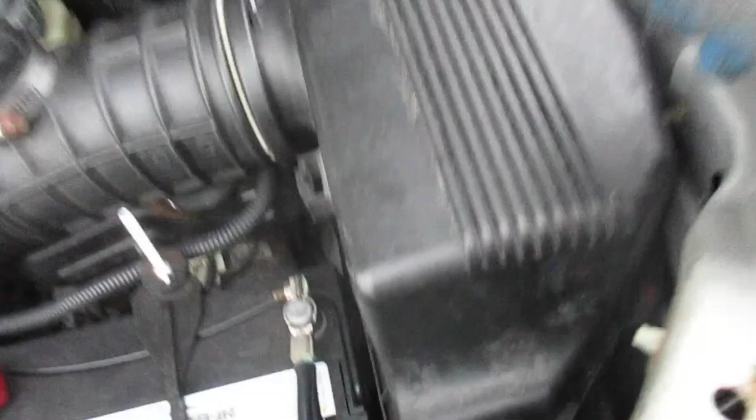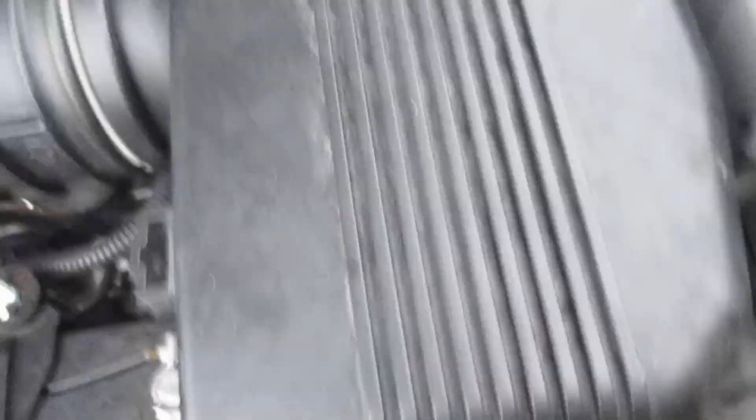So we're going to replace the airbox assembly with a junkyard part, and there's 2 bolts to remove it. One is all the way down there, and the other bolt is right back in here underneath this wire harness. Hard to see, but it's down there.

And here is our junkyard replacement. These are 10mm bolts down there. Very long extension needed.

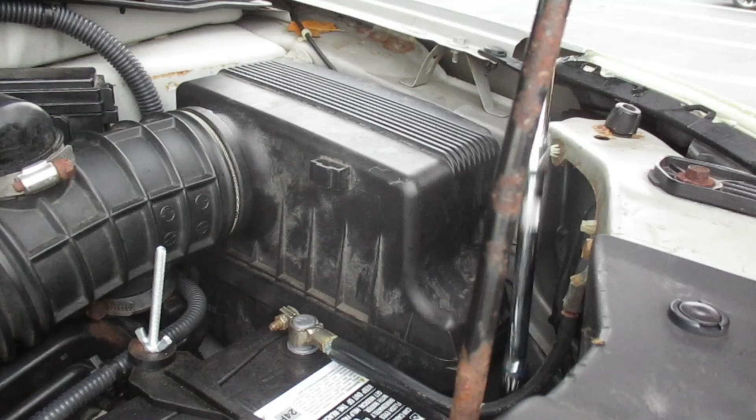It's kind of rusty, but it's alright, I guess. It's reusable.

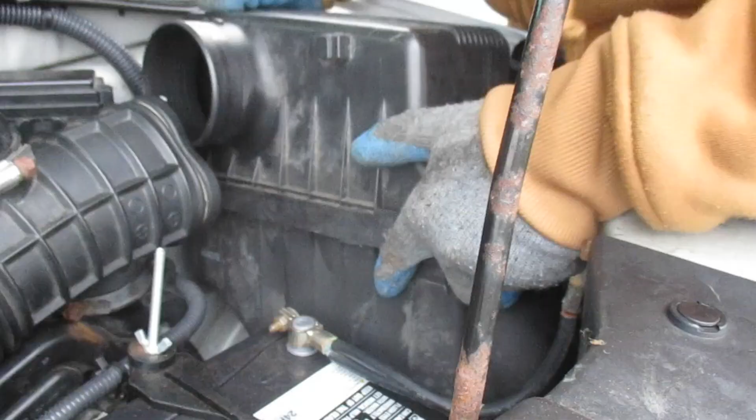Go past it already. Jeez. Thank you.

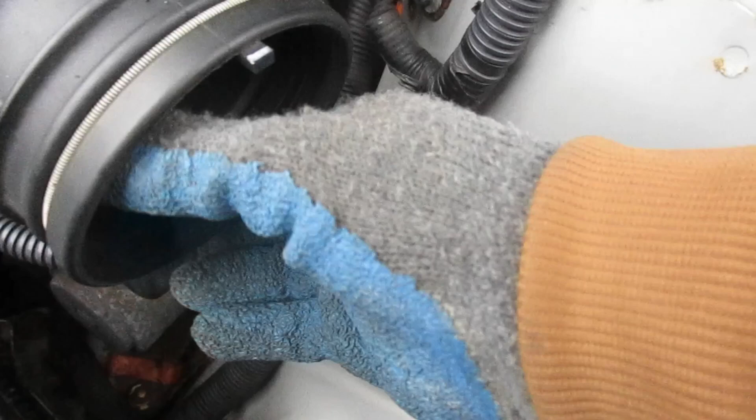Okay, right, there's the one mount that was stuck on. It was stuck on mostly this guy, but also this. Here's the airbox, the screw that got stuck in there, and this one that also got stuck in there. It's stripped. So yeah, now just gotta put the new one in.

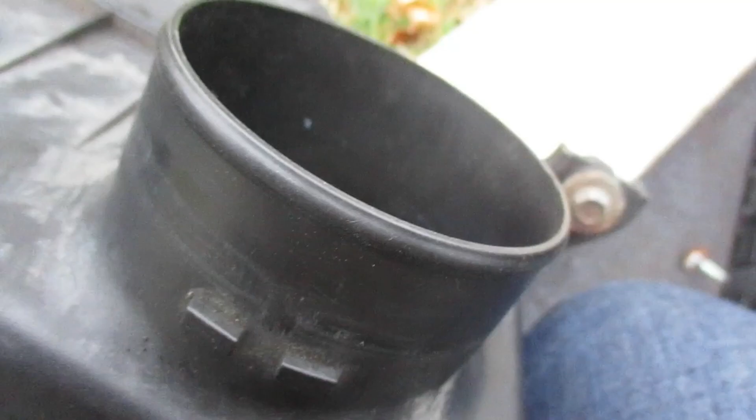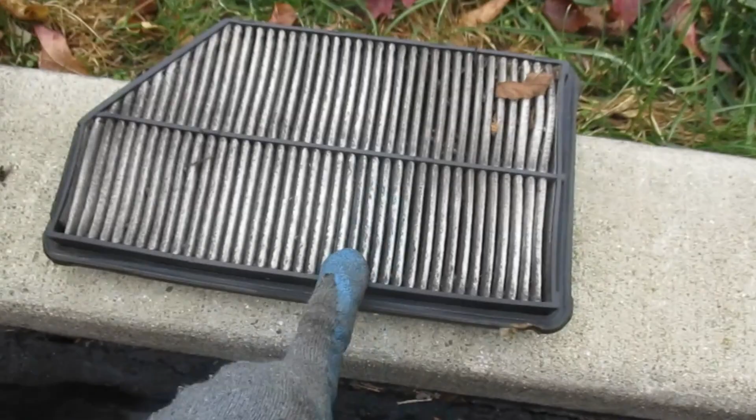So I got these painted bolts in, and this bottom piece down. But you know what I noticed when I tore this apart and broke it? He said the air filter was replaced, but it clearly is disgusting. And I think because it looked like this when you open it up, he thought it was clean.

I think he had someone else do the work, because the person I bought it from had the air compressor replaced. I checked that out, and that's true. I didn't check the airbox, I couldn't get it off. And I think the person he had do the work ripped him off and actually didn't replace the air filter, just left it like that. He thought it was clean.

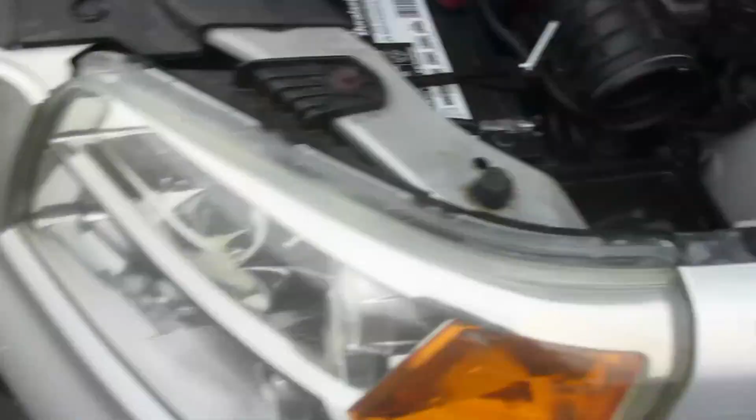So that's it. I'm gonna go buy an air filter now, and then I'll come back and screw these bolts back on with the top cover and the thread locker.

All right, back for round 2. Picked up an air filter at AutoZone, an SA9361. So I got this bolt painted and have some thread locker on it, and that's in there.

And the other one is down there, also painted with thread locker. And now we're gonna install the air filter. Nice and clean.

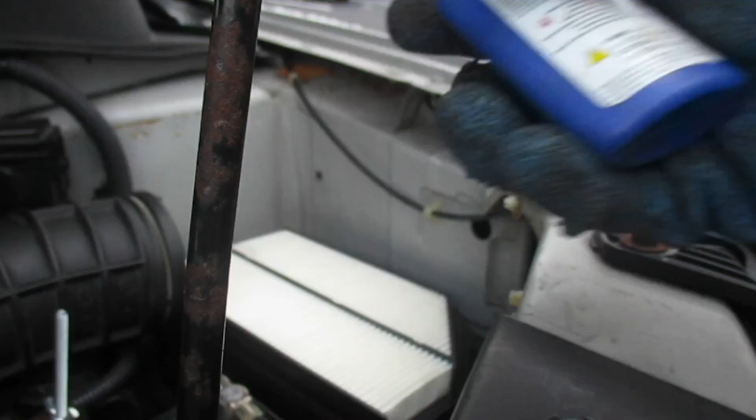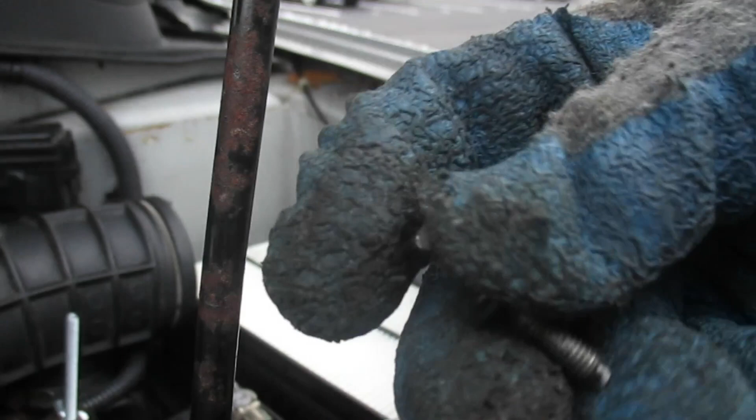The only thing I have is medium strength thread locker, and that's to make it easier to take the bolts out in the future and to keep water from getting in the threads and letting it rust. These smaller bolts take an 8mm socket, and as you can see, I've cleaned the threads and cleaned off most of the rust, and painted them a little bit so they don't rust as easily in the future.

So normally these little holes here have little metal sheaths in them that make it so the bolts are captive, meaning when you unscrew them they don't actually come out like this. But in order to get those 2 out, I had to break them out. So it's fine, we don't need the captive thing anyways, it just creates more rust and makes it harder to take out.

So now we're just going to thread locker these bolts, put these in, and then we're good to go. We have everything reassembled in a fresh air box. Kind of goopy, it's fine. That'll work.

There we go, so that is a job well done. Airbox replaced, air filter replaced, and next we'll do the cabin filter.

So next is the cabin filter, which is located behind the glove box. I happen to have purchased a 2006 Honda Pilot service manual, just to help give me a little bit of a heads up on what I'm going to have to do to change it out.

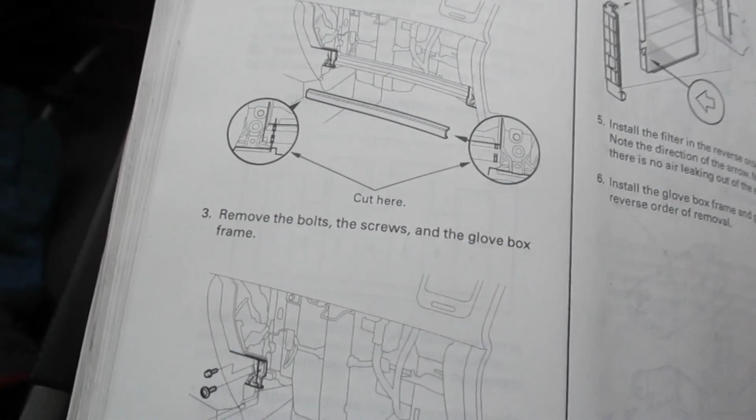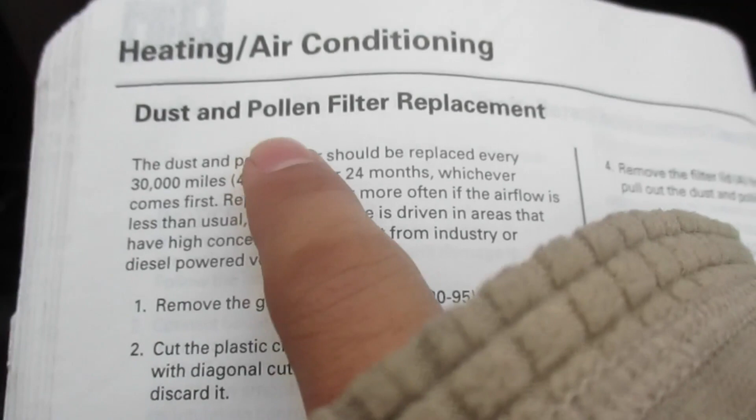Some cars sometimes have a few extra steps, and here we have the heating and air conditioning, that's page 2152, and we have the dust and pollen filter replacement, which is what we're replacing. It says cut the plastic brace in the glove box opening with diagonal cutters in the area shown, and discard it.

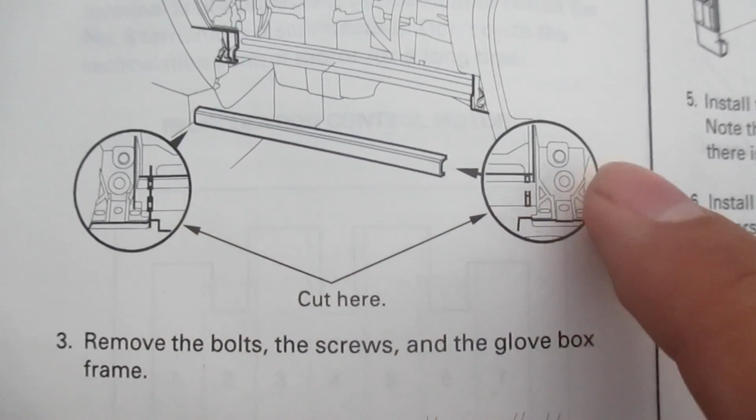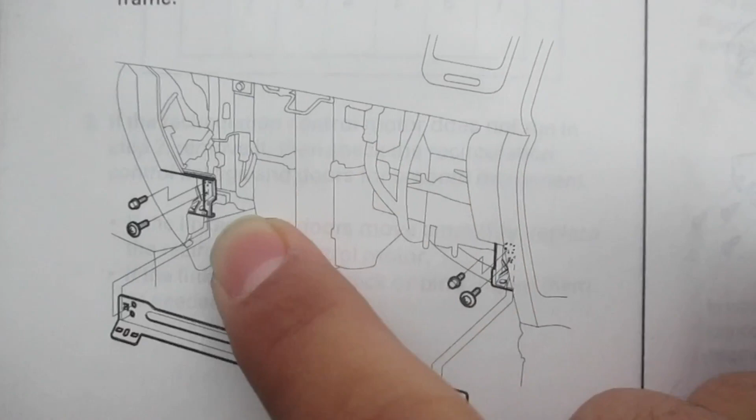So there's diagrams here showing that there's these little plastic clips holding on this little plastic bar, and if it's already been removed it won't be there, but if it is there you'll just cut it and remove it. Then there's remove the bolts and screws and the glove box frame, which are located here. There's a frame, and then there's just a cap on the filter, and you'll remove that to replace the filter and then reinstall everything in reverse.

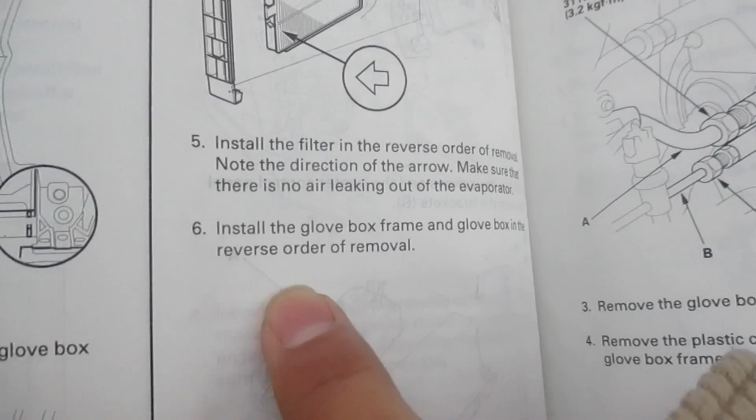And so we'll go step by step on how to replace that in here. So the replacement filter is a STP CAF 1770 air filter.

If I can find some more of these online that are maybe better quality, I'll pick one up. But for now, STP will do for 6 months or whatever until I replace it again.

Alright, so it looks like we pull this down first, and there's some stuff in here, I'll just remove all that stuff. There we go. And then there's these little clips on the side here, you can see, that have little ends that you pinch in, so I'll have to get some pliers in there and pinch it out.

Now mine only has one because the other one's missing, but at the junkyard I went and picked them up, they're free, just these little clip things here. So open my door a little bit. There we go.

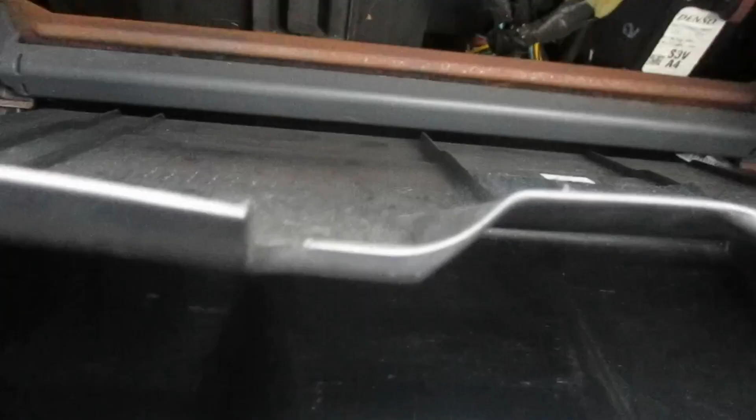Got it. Push up on this a little bit, pull this up. There we go. Oh look, my cross member's still there.

This dude said that the cabin filter was replaced. Well, that's a lie, because if it was, this would be clipped, and it's not. You can see there's these little spots down here where you're supposed to clip it. So it looks like I'm gonna have to remove that.

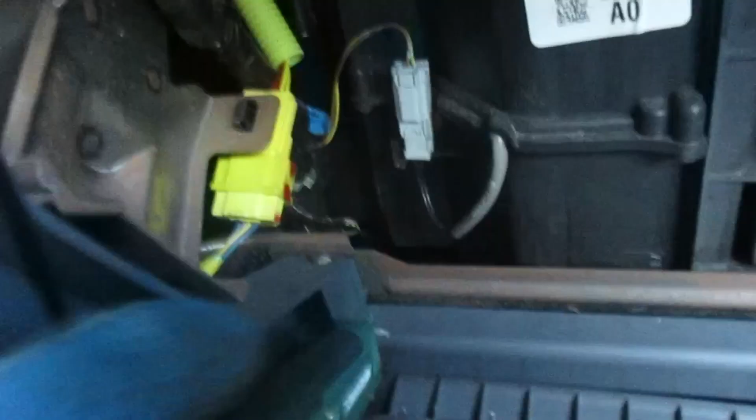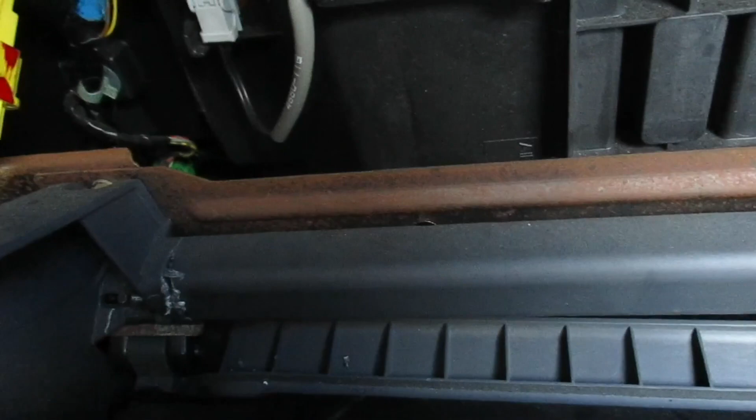Alright, well this is really hard to do and record at the same time, but basically I'm just taking a razor blade and cutting these little slit marks on this plastic trim until I get it free, just working the razor blade back and forth. That's all I really have that works well, and the razor blades are sharp, so.

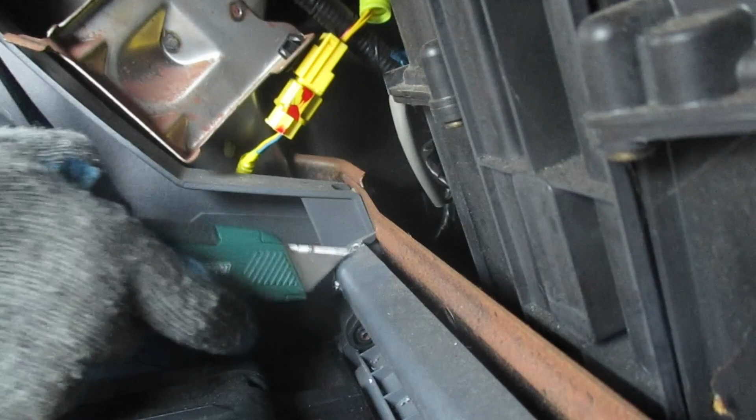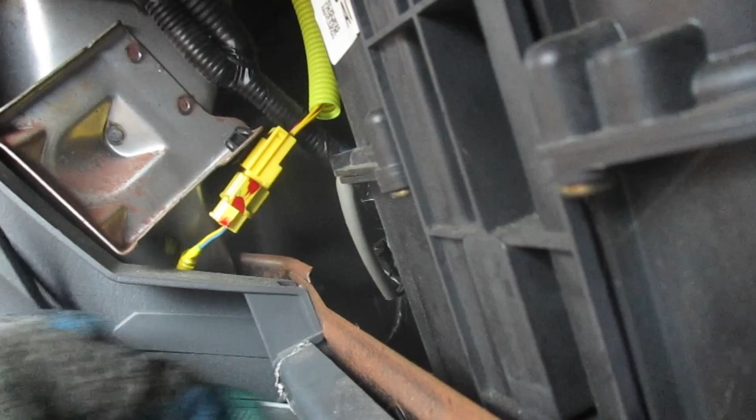Almost there. Hey! Oh, what do you know? Alright, so I got one side free. Looks like I might be able to just bend this out. Oh well, I started breaking it a little bit too. Alright, I guess I'll cut the other side too. Come on, there we go.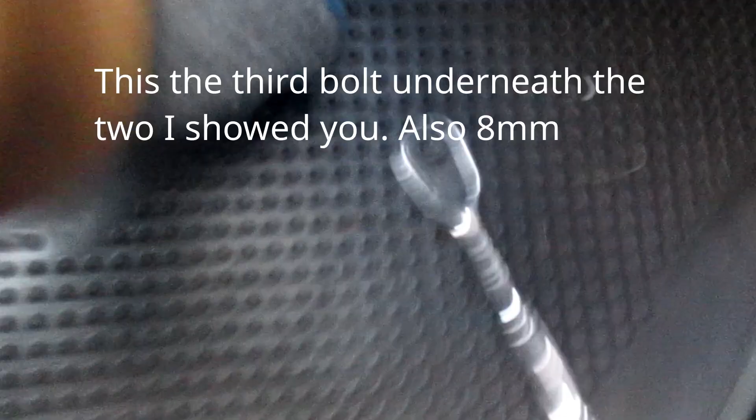Alright, a little 8mm with our two Phillips in there. Okay, finally got it out. These are also 8mm, but they're a pain because they're upside down and underneath, and yeah, it's just a nuisance.

Okay, so you know what? Getting this thing out is a pain in the ass, and I'm not going to bother removing it all the way, and I don't have to. This bolt is behind this piece of plastic here connected to this part of the glove box. But there's a wire harness and a fuse box in the way, so I'll just screw it.

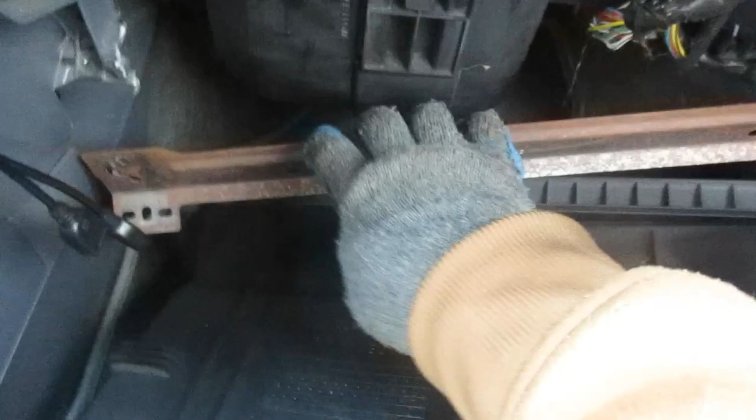You can just pull this down enough, carefully, so don't break anything. You can still access this top part of the cover here for the cabin filter. And if I can pop it up, I can do it from the bottom.

Okay, yeah, the trick is to open the door, let this fall down a little bit here, and then you can reach under and grab this plastic panel, which is disgusting. That's never been cleaned. There's hair, leaves, cobwebs and plant matter and stuff in this thing.

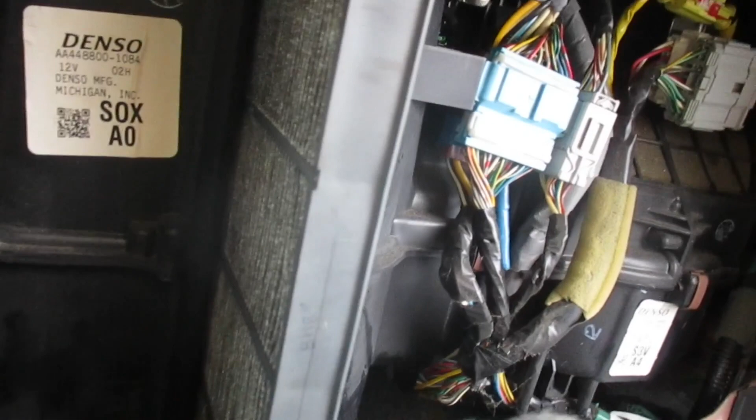Oh, look at this. What do we have here? Oh, goody. Oh. Uh-oh. Oh Lord, it's gross. Oh, there's stuff in there. This thing is black. Oh yeah. Oh dear, there's dirt in here. There's gunk in here.

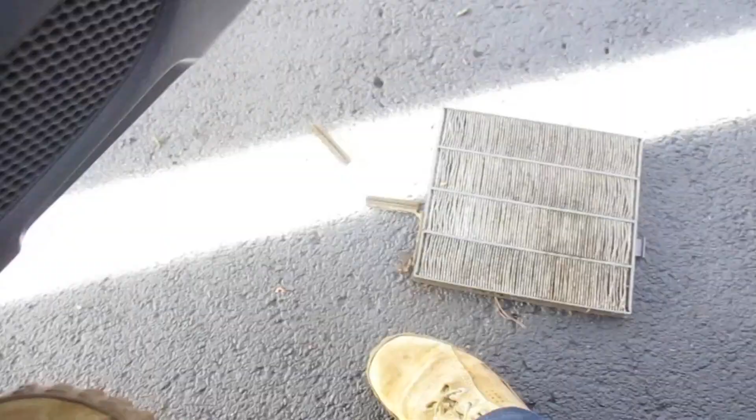Alright, well let's take a look at this old one. Well, it's definitely gross. There's all sorts of fun stuff on there. Ew, that's gross, man. That's like how many years of not being replaced. Oh, and it's all caked in there. Okay, yeah, I've seen enough.

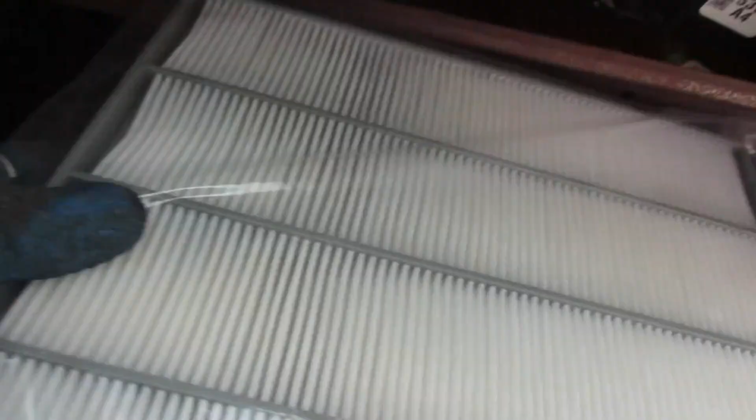And here is the new one. That's what it's supposed to look like. So just for reference: good, bad, good, bad, clean, not clean.

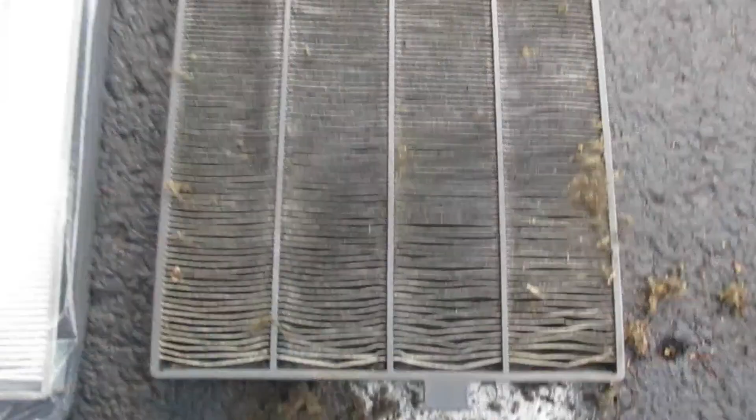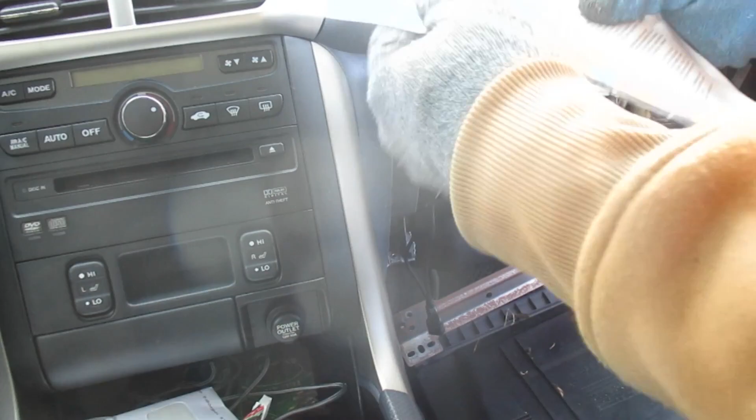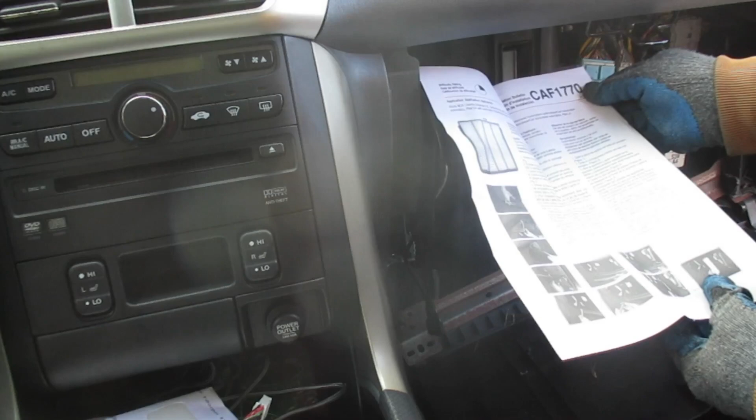It comes with a little manual thing, so you don't put it in the wrong way. It even tells you how to take it apart. And the tab is supposed to be on this right side, on the lowest part. That way you don't put it in reverse, since you can put it in the wrong way.

Now we're good, now we just put it all back together. Hooray. This is a thick part and a thin part, thick part on the bottom. Push that back up in there.

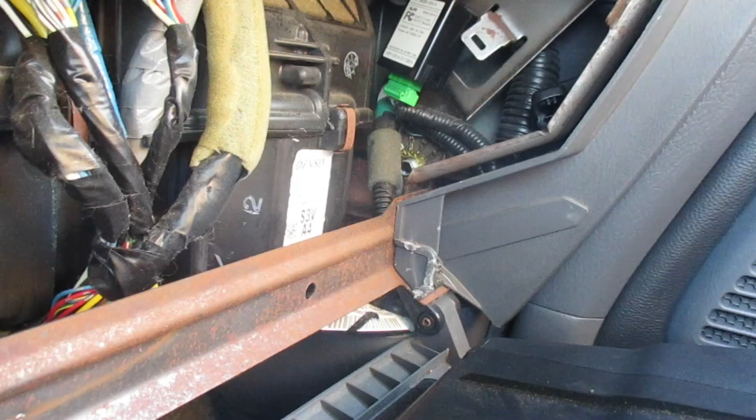Okay, it's not as bad as it could be, because being able to just remove that one side makes a lot more sense. That means you don't have to remove the 2 bolts on the right hand side, you just have to remove the 2 on this side. I'm pretty sure the instructions tell you to do both, which is not fun.

I'm gonna put this back into this. I can't do this with the camera though, so. Okay, I got that bolt down in there, back in place. I just gotta do the other 2, and then the clips back in, and we're good to go.

I think whoever he had do the work ripped him off. Probably charged him more for work he didn't do.

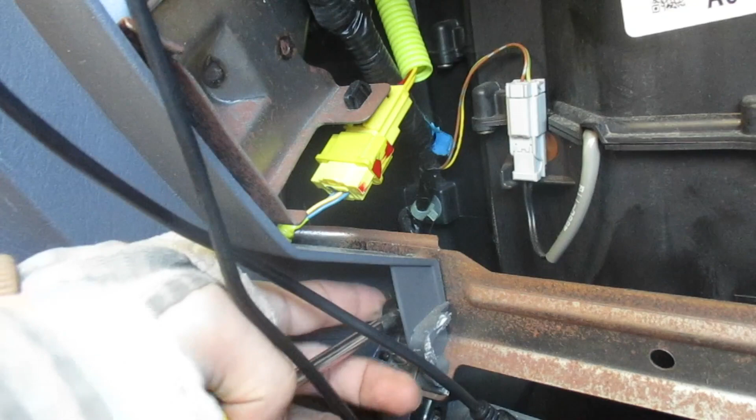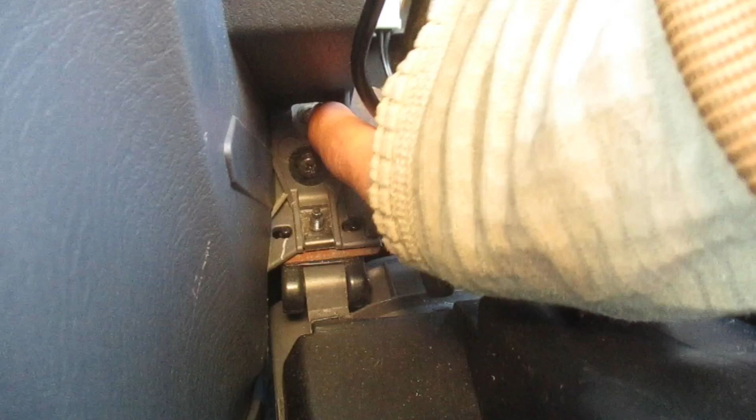Alright, now grab my Phillips. Remember, these are the 2 bolts we're taking out: this one and this one, and the one right here as well. These 3. You only need to take out these 3 on the left side. You can drop the left side down, and then you can pull out this cover for the filter and replace it.

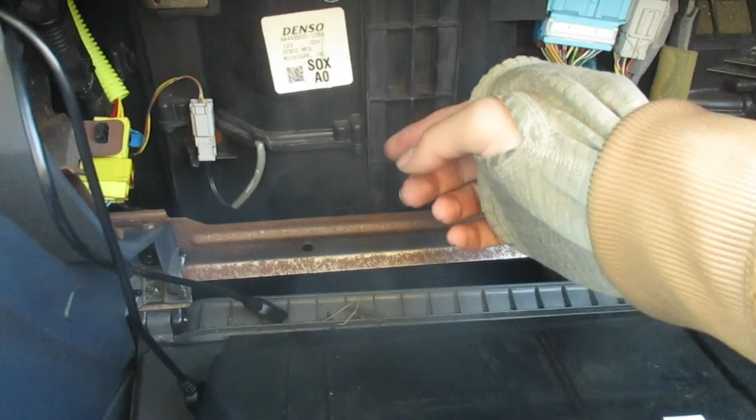And then we just gotta put the rubber grommets back in, which I have a spare now, so these little guys. Now it's dark, hard to see, but this one should be easier. You can see we want to get it in there so that little rubber piece is past the metal, and then just push it in place, push it up, and there we go. Done, that's it.